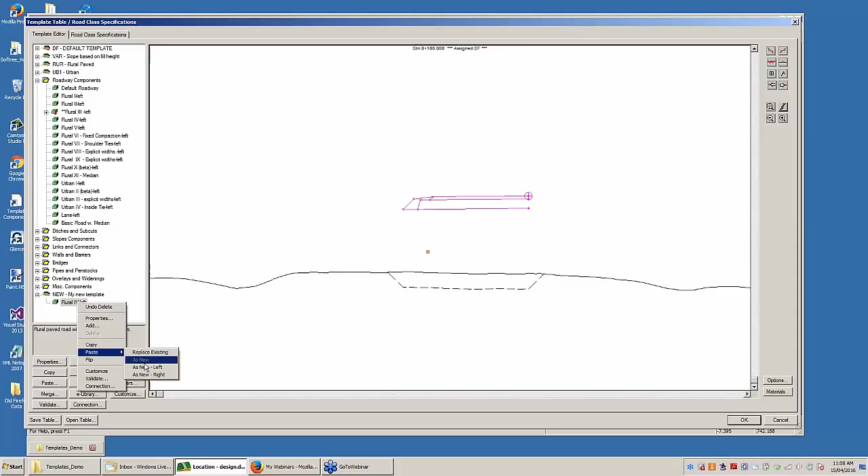So today Craig will be covering template components in Road-Eng,

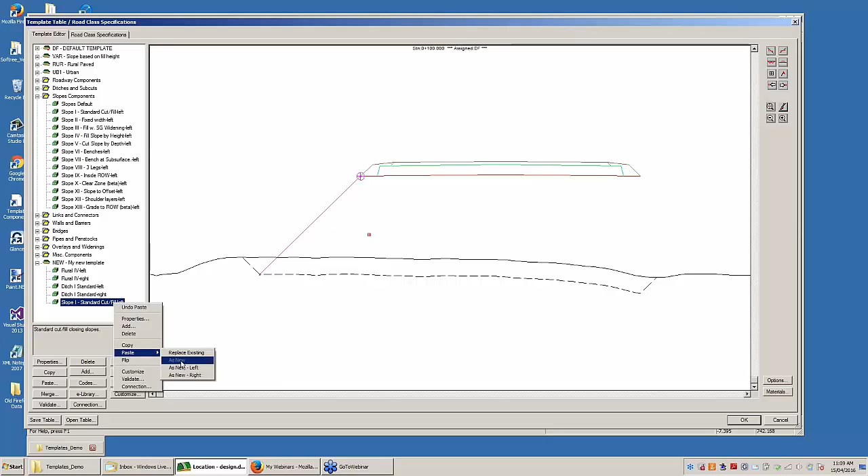And just a quick outline of what Craig will be covering today: parameters, surfaces, and point codes with template components, parameter overrides, reference features, and examples.

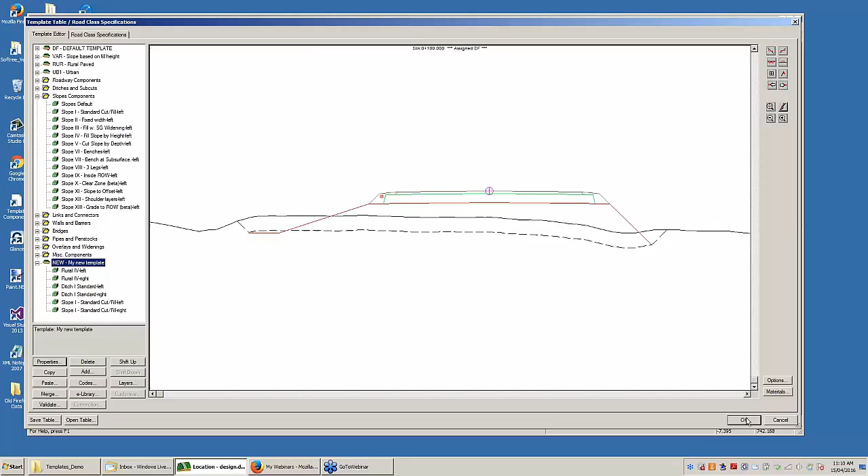So today's seminar is going to be about, and interestingly, this is probably one of the hardest parts of Road-Eng for new customers. I think we typically find when we get a new customer going, we'll spend a bit of time with them to help sort out their template components. The good news is that once they're up and running with a handful of components that work for them, they're generally pretty happy with those ones, and they can modify them and tweak them as they go. But it is a tricky part of Road-Eng, so yeah, you can be expecting that.

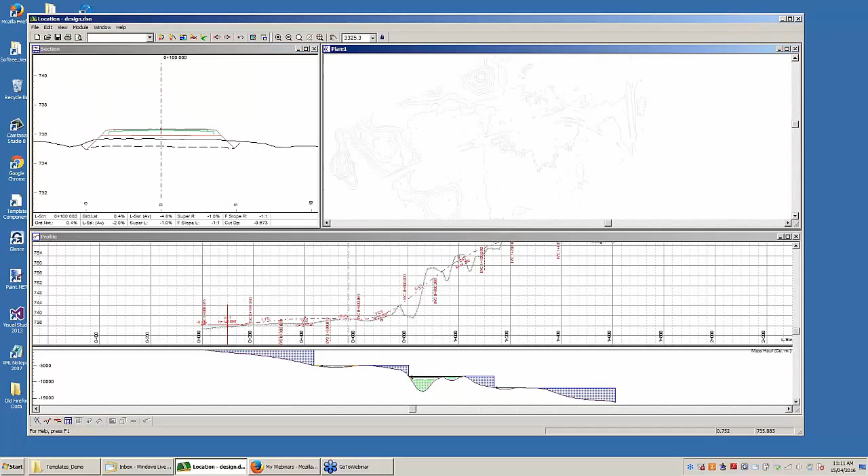Template components, they are the things that allow you to define your cross-sections. And if you're using other software like Civil 3D, they're analogous to assemblies and sub-assemblies and that sort of thing. So here I've got an example road. It's a couple of kilometers long, and it's got a rural cross-section template defined. And in Road-Eng, the way you create, adjust, and manipulate templates is in what's called the template editor.

Edit templates, and this environment is sort of like an experimental area. If you hold the left mouse button down, you can move your template around, and you can see how the template's behaving in different situations. You can jump to a specific station and look at the template on that specific station. And in this environment, what we're doing, moving things around, is not having any effect on the design other than to review how your template's working.

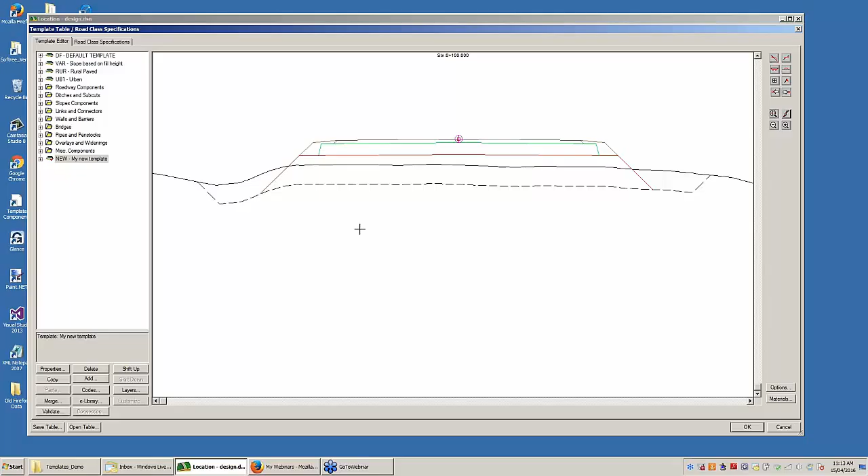A template is made up of what we call template components. So this template here, the default template, is made up of, you can see the left-hand side, it's highlighted there in magenta. It's the left-hand side of a roadway. There's the right-hand side. You've got ditches which aren't active now because we're in fill. If we came down here, you'll see the ditch component. So each of these is a component, and each of these components has behaviors and parameters.

I'll just have a quick look at some of the parameters involved. So I click on the component, I go into properties for this type of component, and in this case I have ACP thick, which is a pavement thickness, pavement width, base thick, and as I move down through these parameters, you can see in the cross-section the software is trying to highlight what that parameter is affecting on the cross-section.

That's just one component. We have a lot of components available. We have an eLibrary. I'll talk a little bit more about that in a minute. The eLibrary is constantly being updated, so it's a good idea to get new copies of the components regularly.

So we have all these components, and what we can do is let's create a new template just to see how that process works. So one way of doing that is to copy an existing template and paste that as a new template. I've got a new template now. Let's just go in and change it a little bit. I'm going to call it new. My new template.

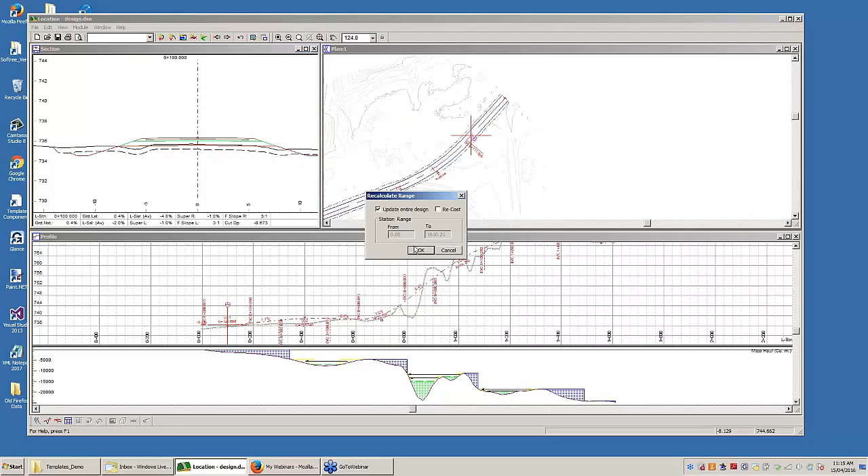You can see that with the template, which is the holder for the components, you have some parameters. You can disable the volumes for a template. You can disable clearing and stripping, and you can set your crown slopes in the template. And you can also disable the super elevation being overwritten by the curved super, so you can fix the crown slopes on your template. So these parameters will apply to the objects inside the template.

So we've created a new template. Let me just get rid of the components that I had in there and replace them with some other components. Let's go into our library entries here, and let's grab, oh, I don't know, let's grab Rural 4. By the way, you can look through these components. You can see they have quite different geometries, shoulder situations, all sorts of urban and rural details that you can get. And each of these is configurable. So there's quite a few options that are available in our basic libraries.

So let me carry on, copy this rural component, place it in here, copy, paste as new. Most components have a left and a right side. So I'm going to go back to the original one that was there and delete it. Again, click on that component, copy it. I'll paste it onto the right. Now I've got a road, basic road object.

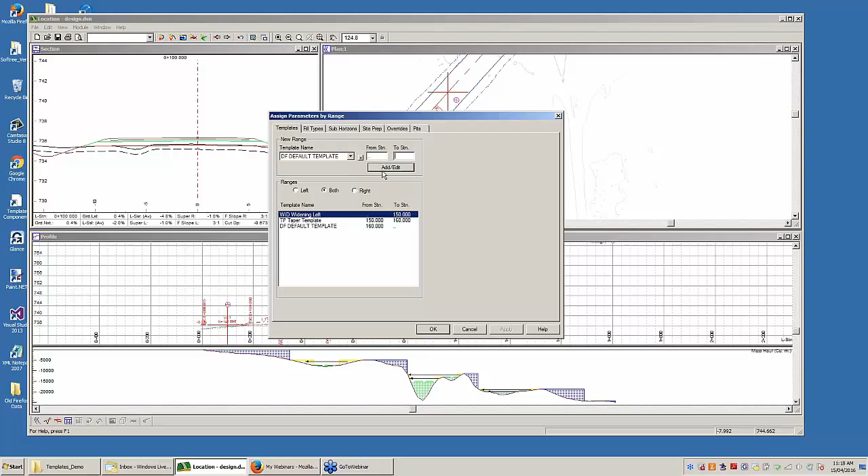It's quite often useful to do one side, get everything set up on one side the way you like it, and then just copy and paste it on the other. Because each one of these, you'll want to dimension to suit your situation, your ACP width, slopes, all these sort of things you would dimension to suit your needs. Once you've got one side done, you'll probably do it on the other.

So I've created a new template. It looks quite different than the other template that I had here, which was my starting template. I've built it using these components, and I can adjust the components to do whatever I want, well, whatever they're capable of. So I've created a new template. Let's just now exit from the template editor with the new template. I'm not going to recalculate anything.

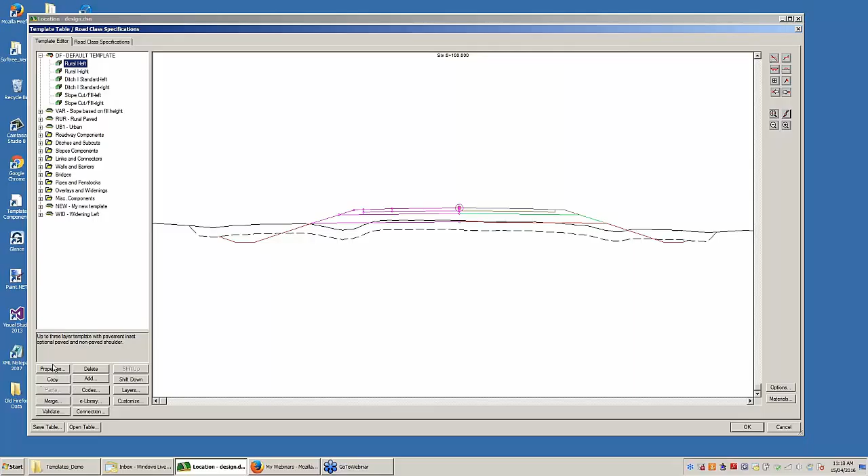I'm going to assign that template to a range of stations. So I do that in Edit, Assign Parameters by Range. Templates, the first tab here, and I had the default assigned to the entire road before. Now I'm going to choose my new template. There it is. And I can assign that either to the whole road, or I could maybe assign it to a range of stations if I wanted. I'll just assign it to the whole road.

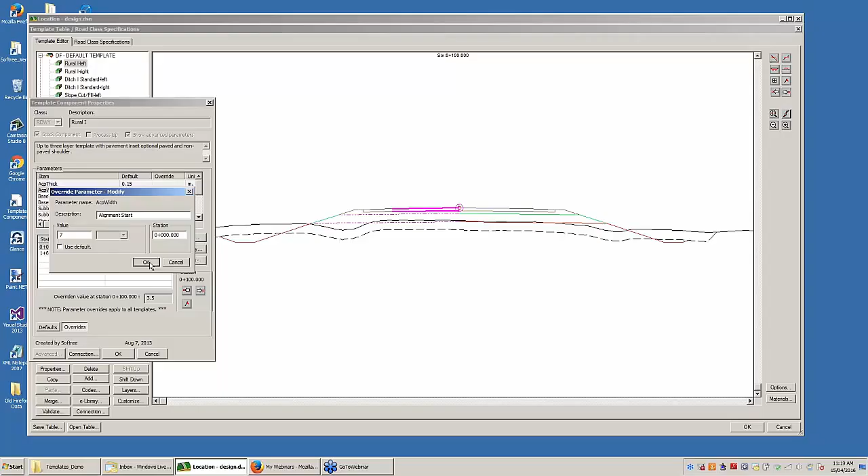And there we go. We've got our new template assigned to the whole road. So that's the process. You create templates. The less you have, the better, of course. It's just simpler. You assign templates, and then you assign them to a range of stations.

One thing to note here is that I have stripping going on. And stripping in RoadEng can be handled by a template, but it's much easier to handle stripping through an assignment, which is done in the same menu. Edit, Assign Parameters by Range, go into the Site Prep tab, and here I can assign stripping to different ranges of stations. And in this case, I've got a stripping depth of 0.5 meters, and I'm telling it to go from the slope stake base with a 0 offset on both left and right sides.

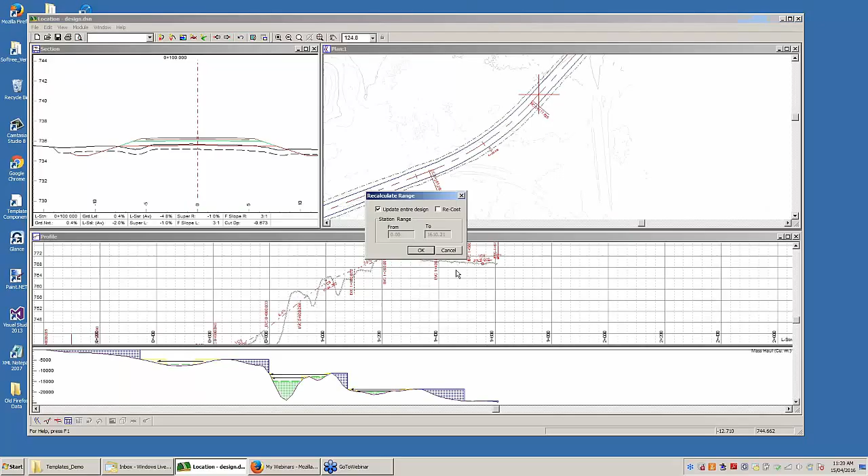And so that's what it's going to do. It's going to remove 0.5 meter of overburden out to the slope. If I wanted to add something there, maybe an extra offset from the slope stakes to strip to, I just make that change, recalculate, and we should see the stripping. So the stripping is dealt with on a special basis. It's a lot easier to deal with it in the Assign Parameters by Range than with the template.

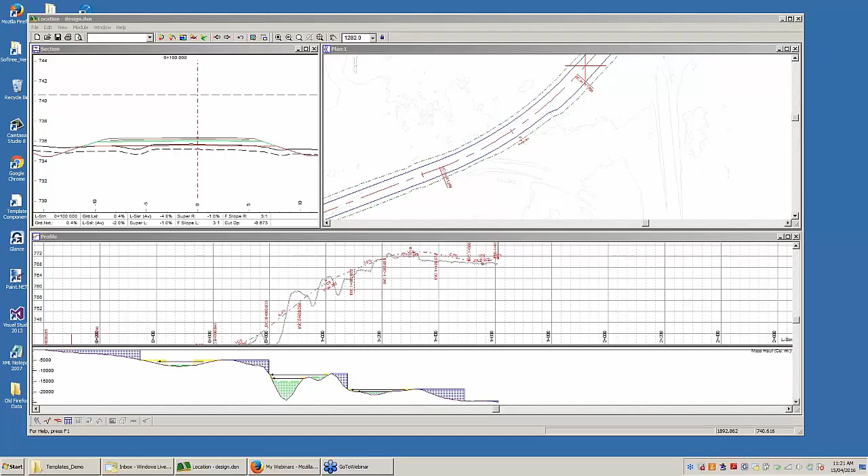So lots of options here. Ideally, you want to find a template that works in all the situations that you have, which involves oftentimes having a smart template, a template that does certain things the way you want to do. But in the real world, you'll find situations where you just can't get the template to do exactly what you want. So you're faced with having to change it in some way.

Let's just look at an example here for a second. I'm going to go back and reassign the default template. This is so I don't get confused, which isn't very difficult to do. I'm going to assign our default back to the whole road. And let's look at how we might widen the road down at this end. Just simply widen it. So the most straightforward way to do that is to go into Edit Templates,

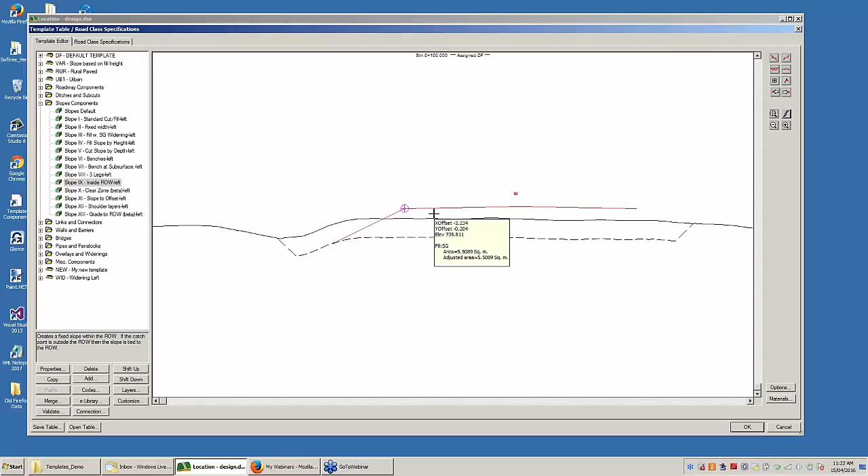copy this template, paste it as new, and I'll change this one. I'm going to call it Widening Left. Oops. For those of you who use RoadEng, this might be a bit mundane, but bear with me for a second. Widening left, I'll go into this side and I'll widen the lane width. Let's go out to 7, so it's quite a bit wider. So I've got a widening left template now, and I'll come in and I'll assign that template to a range of stations. Widening left.

Oh, I understand there's a question. Let me just finish my thought here.

So I'll make this widening apply to 0 to 150. Press Add Edit. So now you can see we've got widening left 0 to 150 and default template beyond that.

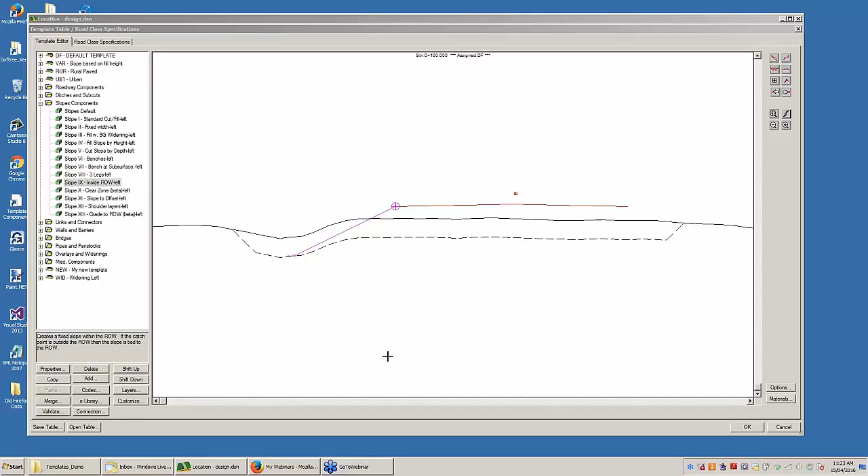Let's just go ahead. I know there's a question pending. I'll come to you in a second.

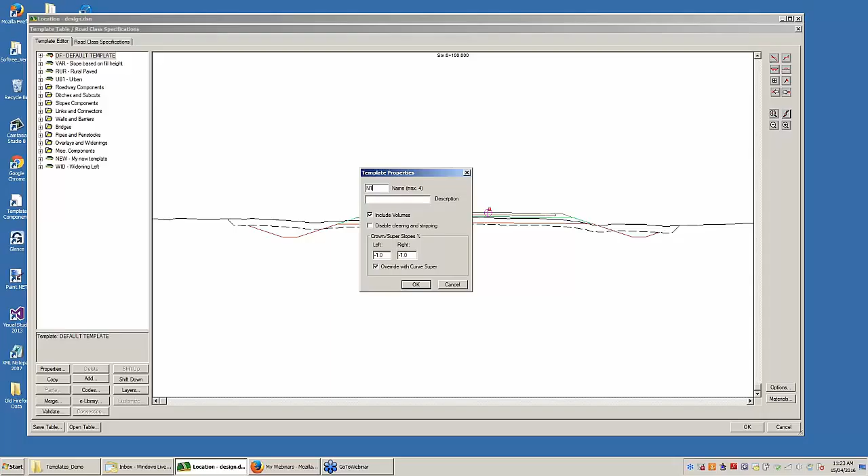Press OK here, and we zoom in, and you can see what's going on. We've got station 0 to 150 wider road, and then a very abrupt transition. And I'll come back to this transition in a second.

Let me just have a look at the question. Sorry. Okay, well, this font is too small for me.

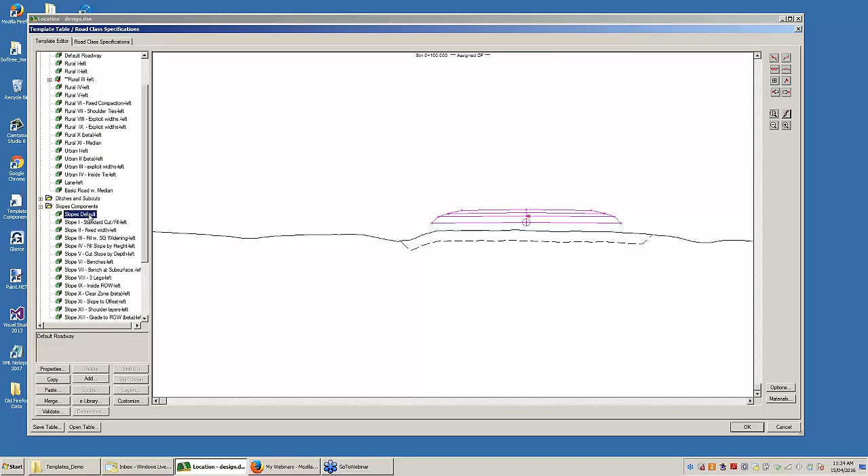Is there an option to create a transition area between two different templates? Aha. Timely, very timely. I'm going to answer your question right this minute. Okay, so we've got a template here, and there's obviously an abrupt transition. That is not what we want. So we have a way to deal with that. We actually have several ways to deal with it.

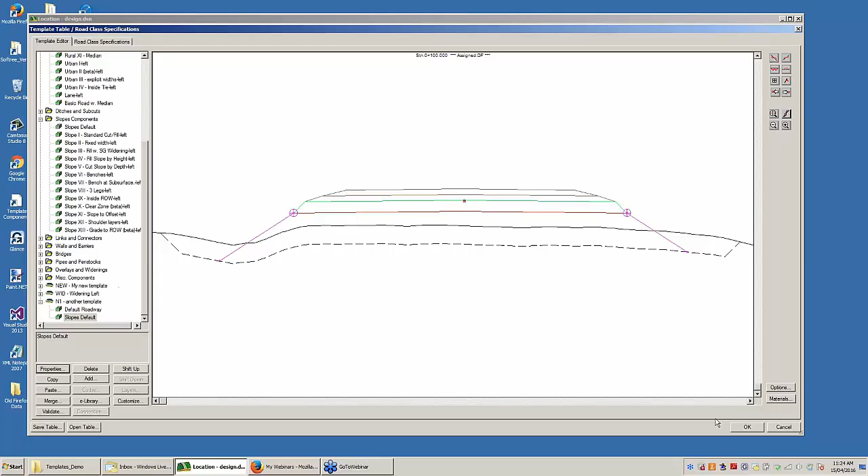The most straightforward is to just assign a special transition template, which we call the taper template, to a section in between here. So let's go from 150 to 160. I'm going to place this taper template into. So now I've got widening 0 to 150, taper 150 to 160, and back to the default from 160 onwards. Press OK, recalculate, and there you can see it's transitioned between the two templates over that range of stations that I gave it.

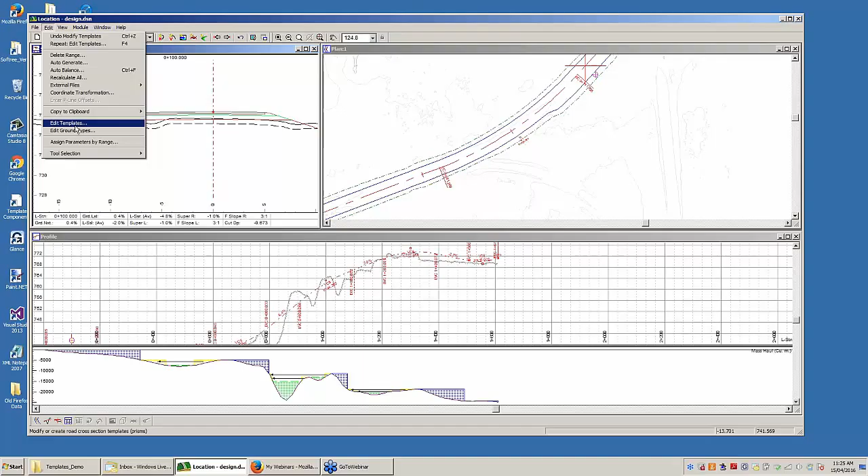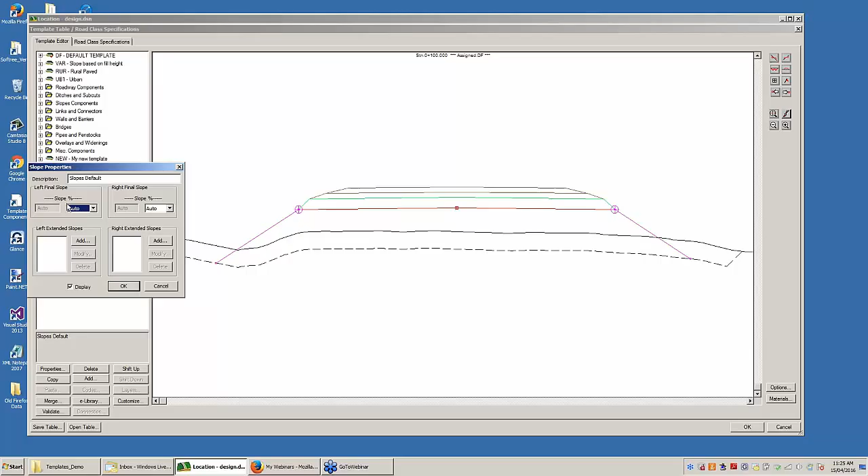There is a bit of a catch with the transition template, and that is that the templates that you're transitioning have to be quite similar. If one of them is an urban section with sidewalks and stuff, and the other one is a rural template, and you try and transition between them, it's not going to do a very good job. So where you change from completely different cross sections, the transitioning does not always work that well. And there are other ways to deal with that, but that's basically one way to transition.

Okay, so that's the most straightforward way of dealing with forcing and changing the templates. Let's just again go back to our default for the whole road and have a look at another way of doing this. So I'm just going to reapply the default, get rid of all that stuff, recalculate it. We're back to the default for our entire road.

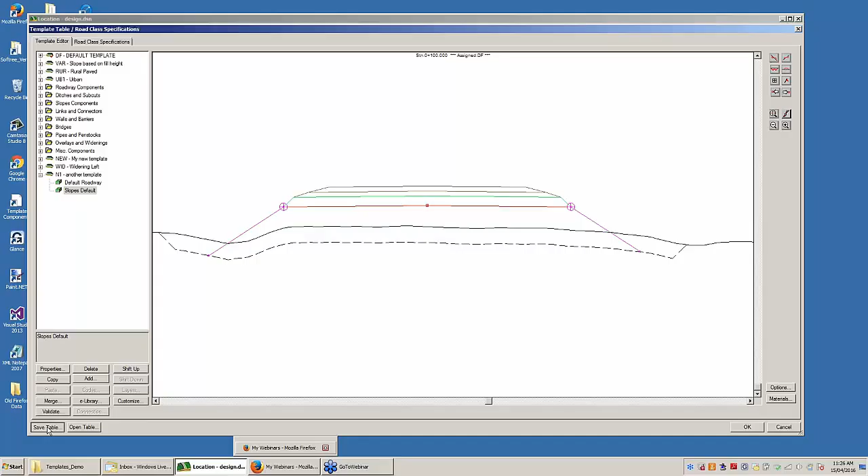By the way, all these techniques apply in other dimensions. For instance, if you had a deeper ditch template, you would see it in the profile and so on. Okay, so let's look at another way of widening the road which does not require creating another template. And oftentimes we get people's files and we see people with hundreds of templates, literally. It's not the best way to do it. If you're just varying one parameter, there is an easier way to do it. And that is something we call parameter overrides.

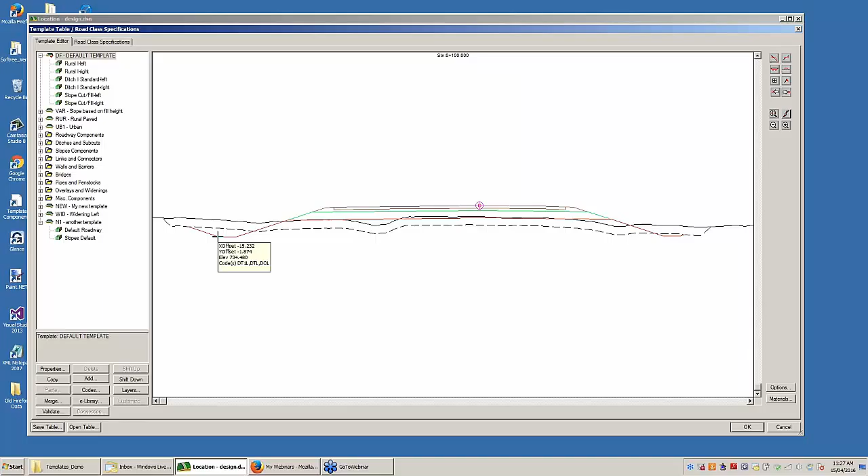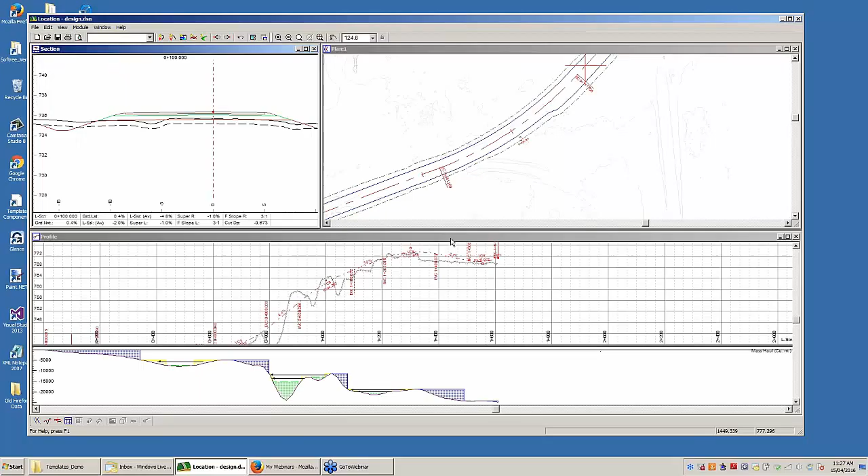So what I can do is I can modify that. I can say, okay, I want to start with, let's go 7. I think that was what we did before. 7 at station 0. We'll override that value. And then I'm going to add another override. This one's going to be at 150, and it's going to be 7. And I'm going to add yet another override to taper it back to the default at 160. So I'm going to go back at 160.

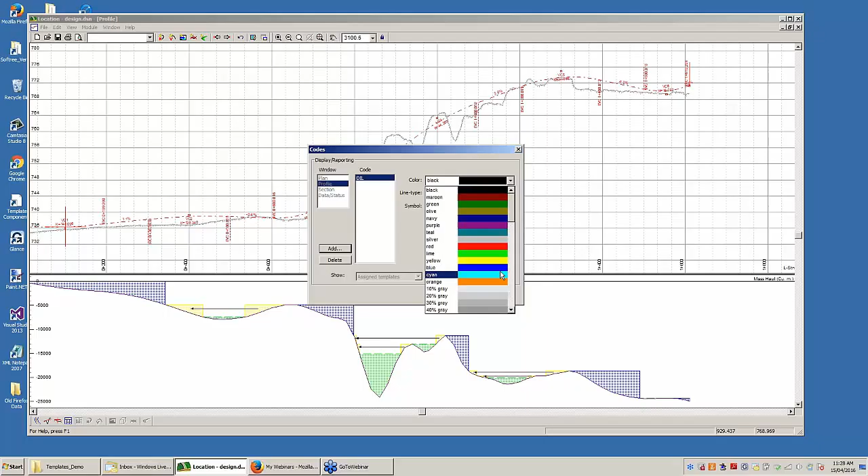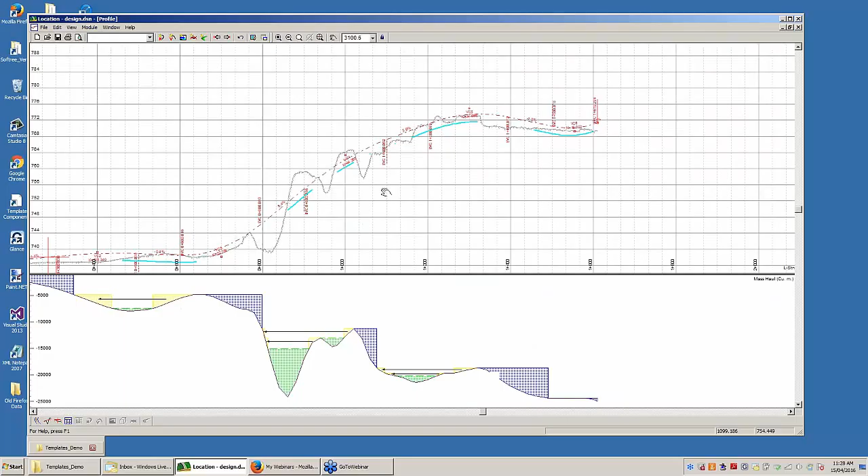And this should give us, if I didn't screw up, something similar to the multiple template approach. So 0, 7, 150, 7, and anything in between it's going to linearly interpolate. So if I made 150 a bigger number, 10 say, then it would vary linearly between 7 and 10 in that station range. And back at 160, it's going to go back to 3.5. So let's just have a look at how that works. Press OK here. Press OK.

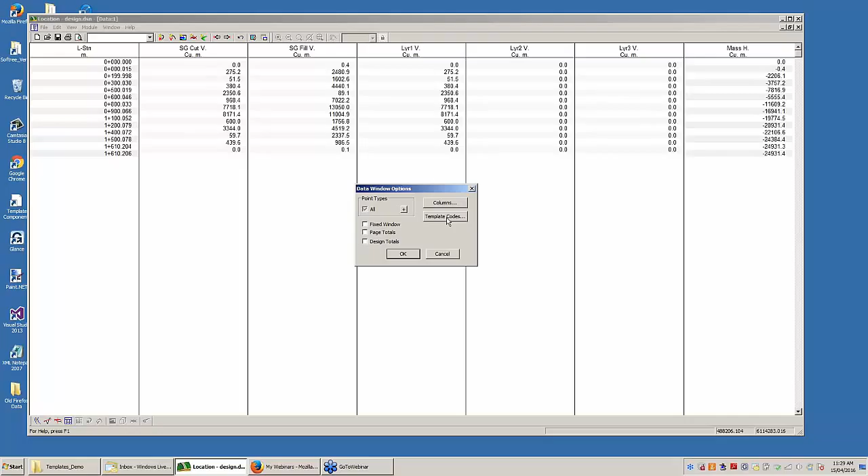And there we go. Same effect, but this time we still only have one template assigned, and we've just varied the width of the road. And this technique, you know, it's a little bit tedious, but you can control various parameters in the template explicitly that way without having to change templates.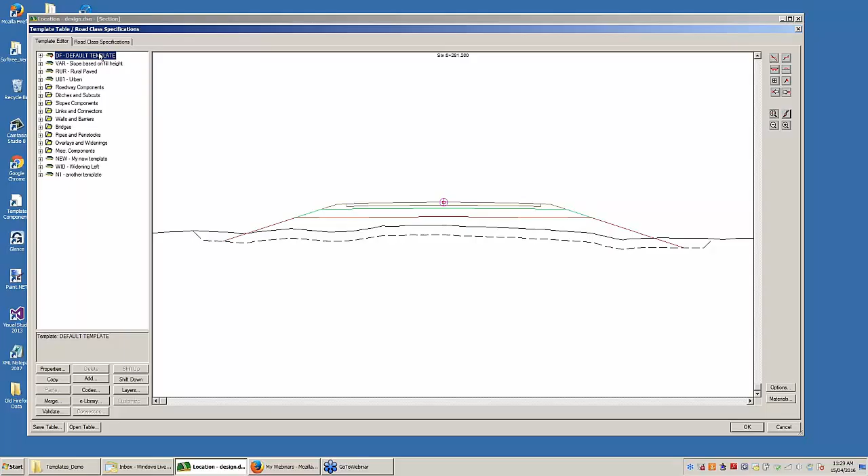Let me just check here. I've got another question. Can the side slope follow an existing constraint within a particular zone, land acquisition? Yes, absolutely. Let me just repeat the question. The question is, can the side slope follow an existing constraint, like a right-of-way boundary or some land constraint? And the short answer is yes. The way that's dealt with is we would choose a template component that does that. When I created the new template, I used just the default slope, but there are other slopes that will do things like stay inside right-of-way here.

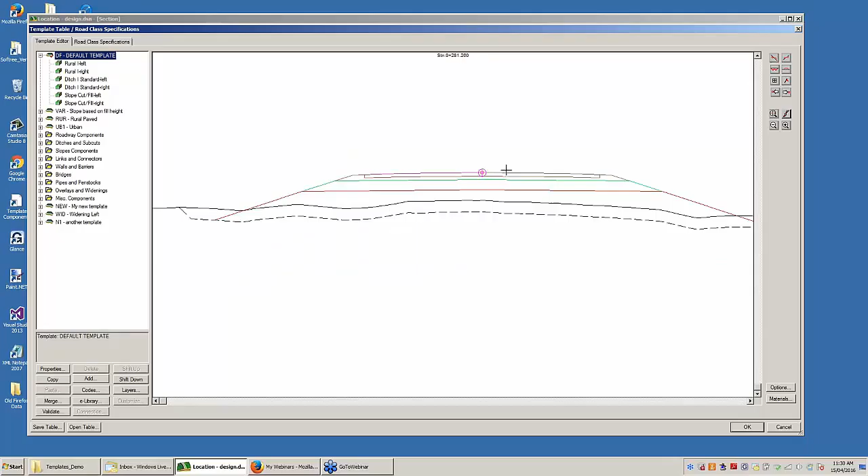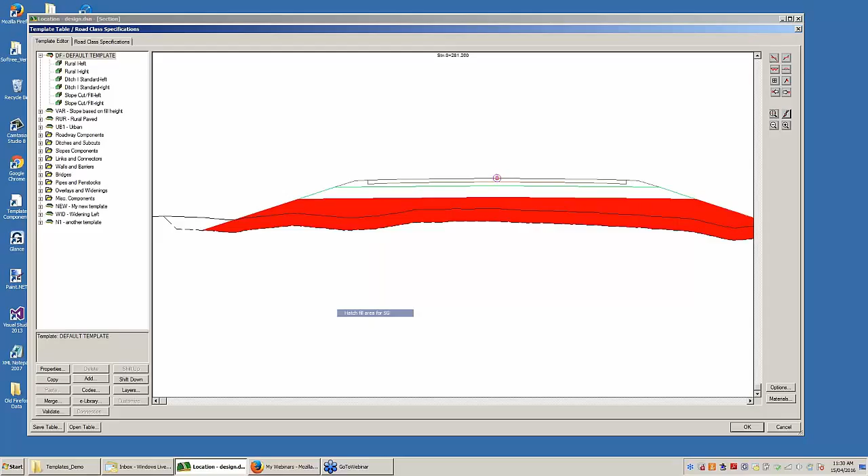Here's an example of one. Properties, you can give it a right-of-way offset, and it will stay inside that offset. There's other components that will, for instance, widen the ditch to get material and close to a right-of-way. Yes, there's lots of ways of doing that, and the way to do it is to choose a component that does what you want to do from our standard library here. Yeah, slope to offset and so forth.

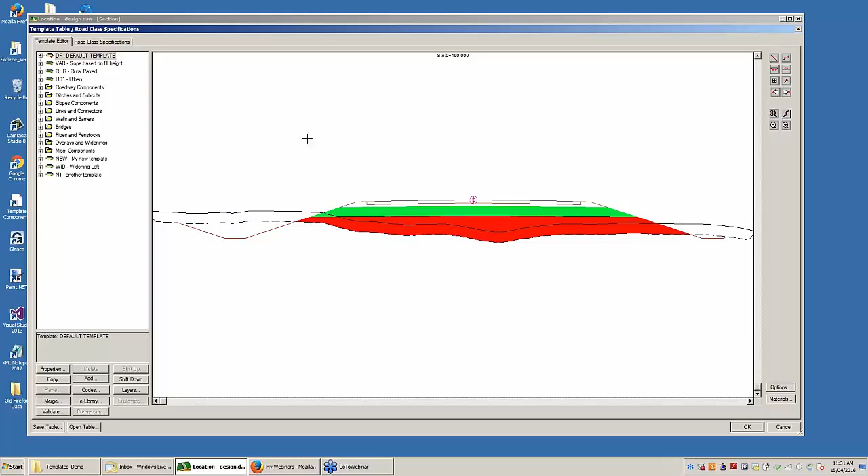Okay, I got another question. I'm sorry, these questions on my screen are in tiny, tiny, tiny font. And you want me to read it out loud?

Okay, in templates, in very steep slopes, the OB layer can run off the page to the ground slope override. Yes, that's very true. Can you, in the template editor, get the cut slope to cut the OB layer at the top of the cut and ignore the ground type? Yes. That's very simple. And that is done by, let's look at the default template that most people would have, which I kind of skipped over a little bit. If I just take a default template here, new one, another template.

Okay, and I change these components out again, and I put in our standard roadway, which is sort of a legacy component, but it will appear a lot of times in your new designs. And delete this, and I'll grab the same thing. I won't bother with the ditch. Copy,

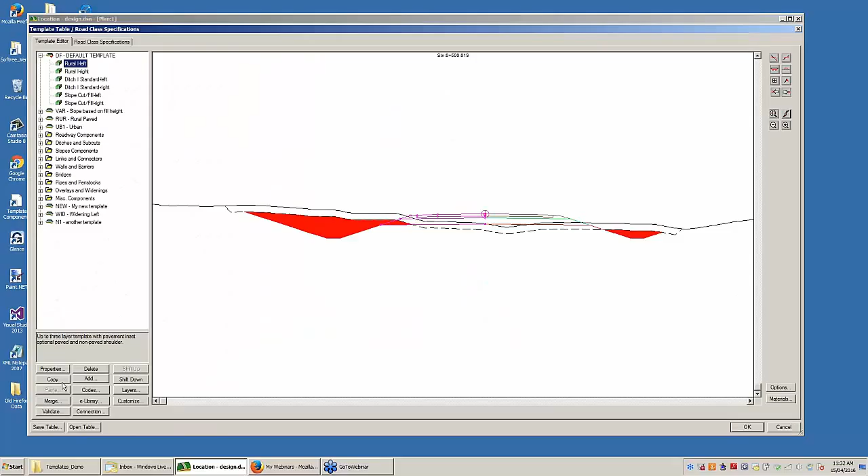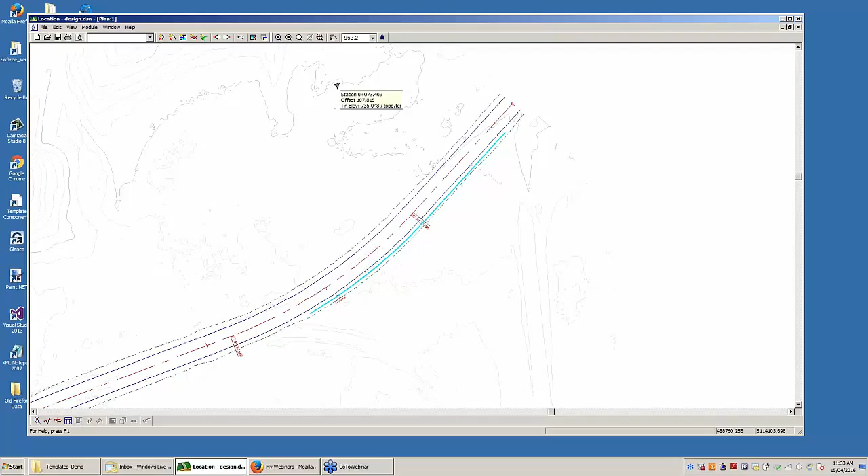edit, paste as new. Okay, in the default slopes component, there's a slope control called auto. And what auto means is use the ground slope. So if you've got one or two layers, and you've got your slope set to auto, it will change slope as it penetrates through those layers. And what the question is about is that if you're on a steep side hill and you have a layer of overburden and it's got a very shallow fill angle, the slope will run away.

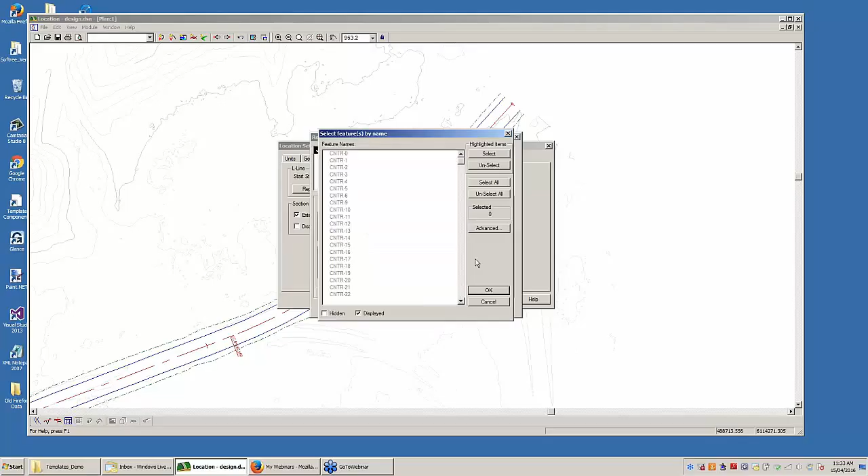So what you can do quite simply is to go in to your template and change that slope, set it to whatever you want here. So stop using auto and explicitly change that slope. I hope that answers your question. That's one way of doing it. The other way of doing it is to strip off the overburden, so you're into more competent material that have better angles. But yeah, having the slope controlled by material type is quite useful, and that's what this auto setting does here.

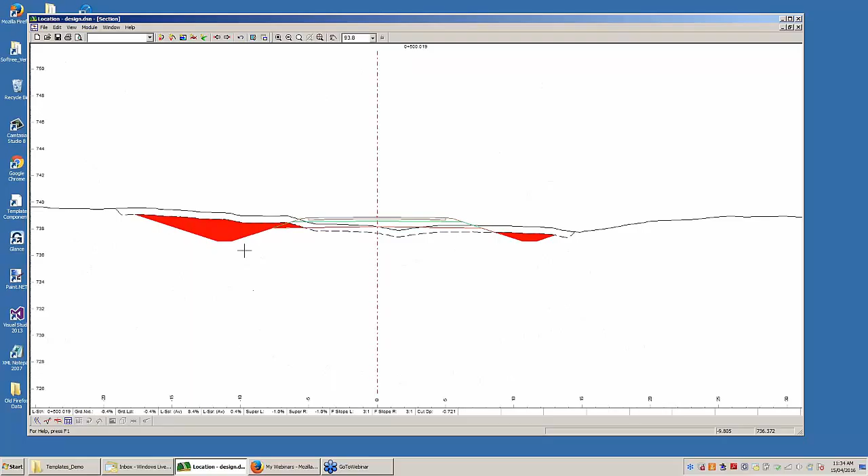Okay, if I didn't answer the question, call us or email us, and we'll be happy to go through that question in a bit more detail. This design is not the best to illustrate that because it's on pretty gentle ground.

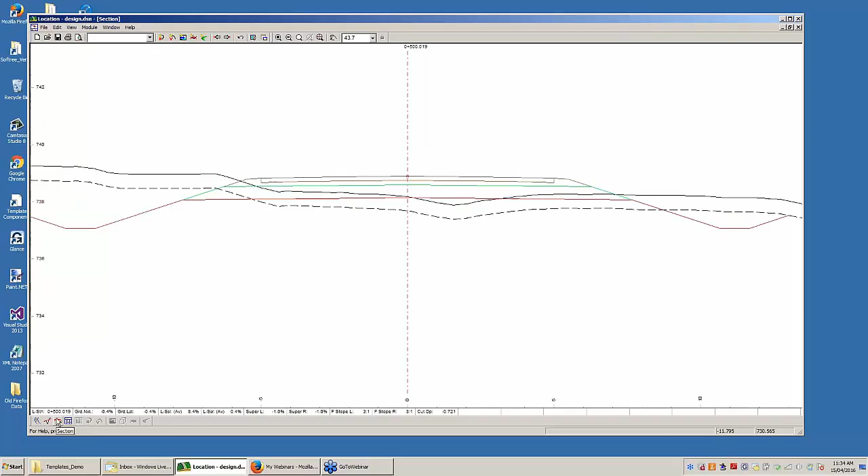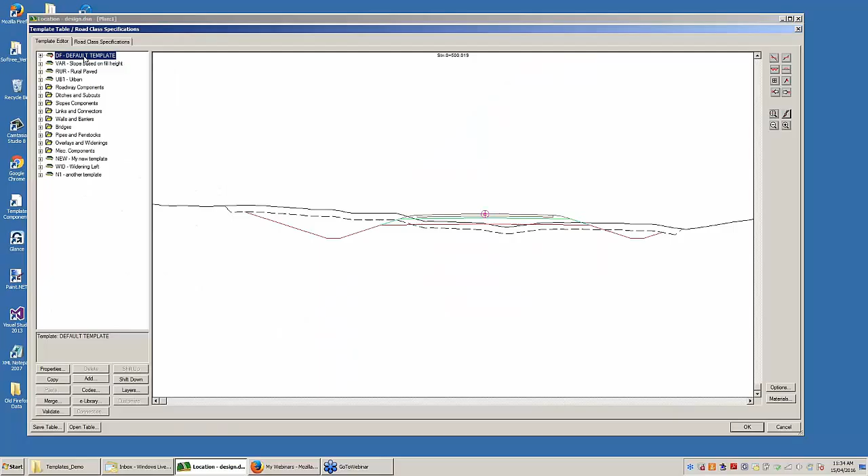Okay, by the way, just in passing, the template editor, you've got all these templates and components and all this stuff, and you want to save them because you're going to reuse them. You can do that in here. You can save the table. You can save whichever components you want from the table, and then they can be reused in future sessions of RoadEng. Okay, let me just see a couple of other things I wanted to talk a bit about.

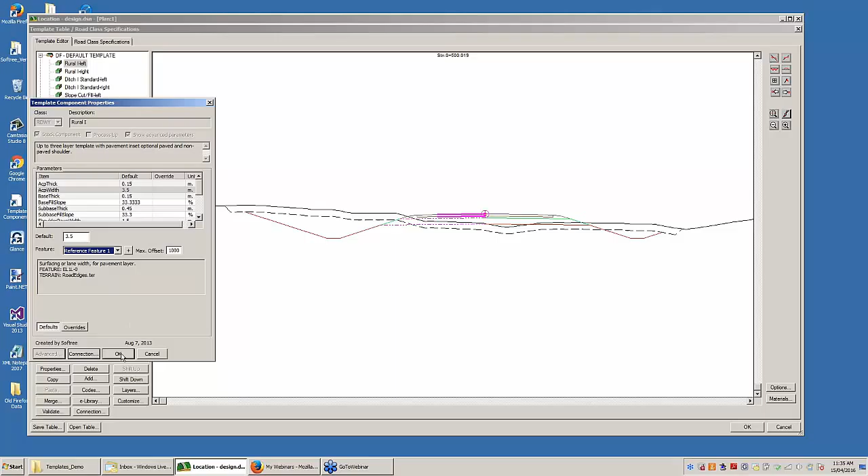Point codes. A very, very important part of templates is point codes. So if I just hover on one of these vertices here, you can see down there it says codes, and it's got several, the main one there is REL. DBL might be interesting, but REL is certainly interesting. There's another template point code down there called DIL.

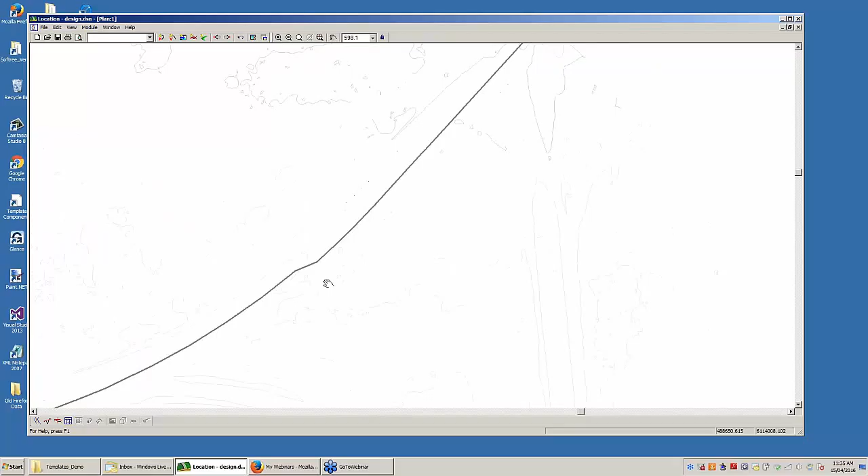So you'll find in most of our templates, those point codes are standard, RE, road edge, or edge of subgrade. DI will be ditch inside, and then it'll have a left or right designator after it. And there we've got DOL, and then SS, SSL, and SSR. Okay, what can we do with point codes?

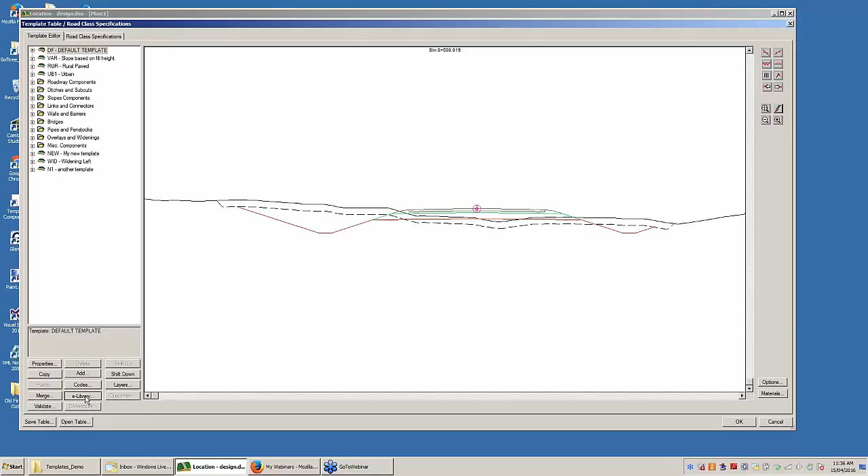They're actually quite useful. One of the things that's easy to do is to display in our profile window a ditch line. So I'll go into the profile window and go to the options here, and I'll go to where it says template codes, click on that button, and I'll add a template code. I'll add the ditch inside left. There we go. We'll give it a color and a line type. And recalculate. So now you're going to see the sections of road where that point exists. So in here, obviously, if you look at a section here, it doesn't have any ditches.

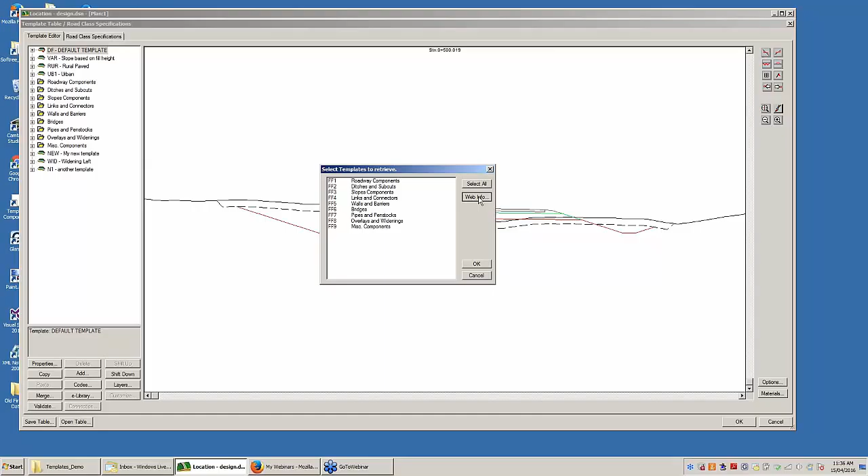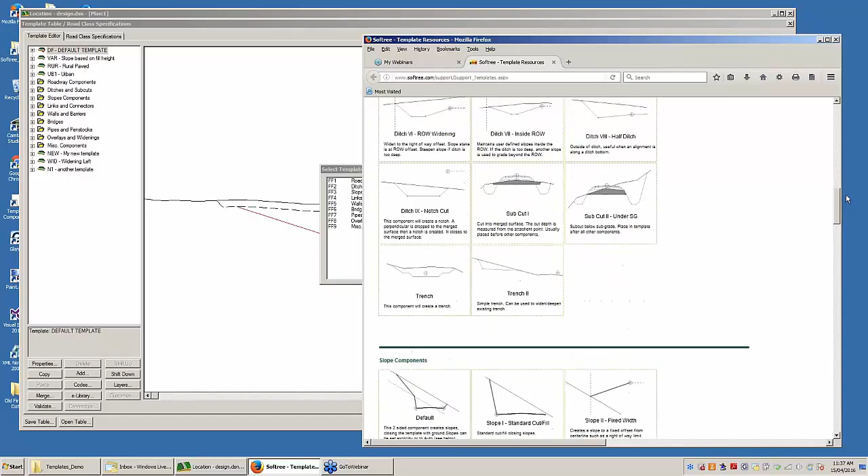And of course you can display these point codes in the plan view. Same thing, if you wanted to add point codes into the plan view, you could add a ditch line in the plan. Again, color, line type. And there we go. So you got ditch lines in the plan. So the point codes can be very useful. You can do things in the data window here. You can add point codes into the data window and get the coordinates of those points.

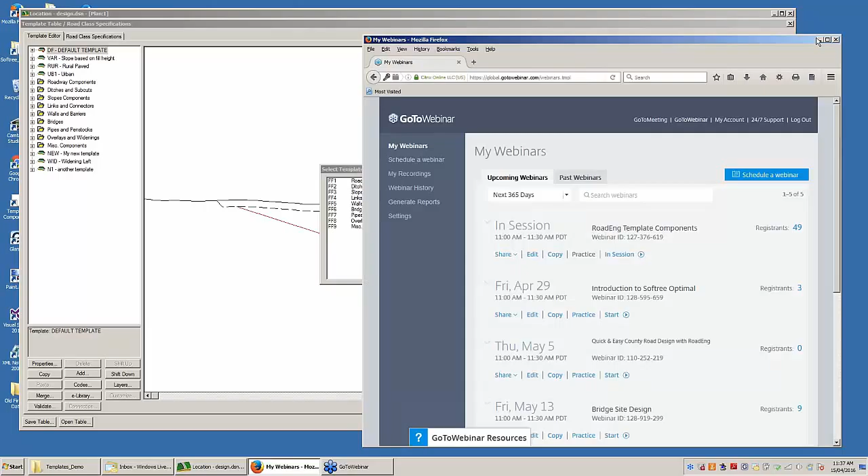So in summary, the useful points on the cross section have codes with them, edge of pavement, edge of slopes, and those codes can be used to draw in plan and profile, or they can be exported through the data window. So point codes are very useful. Another thing about templates that is very important is volumes.

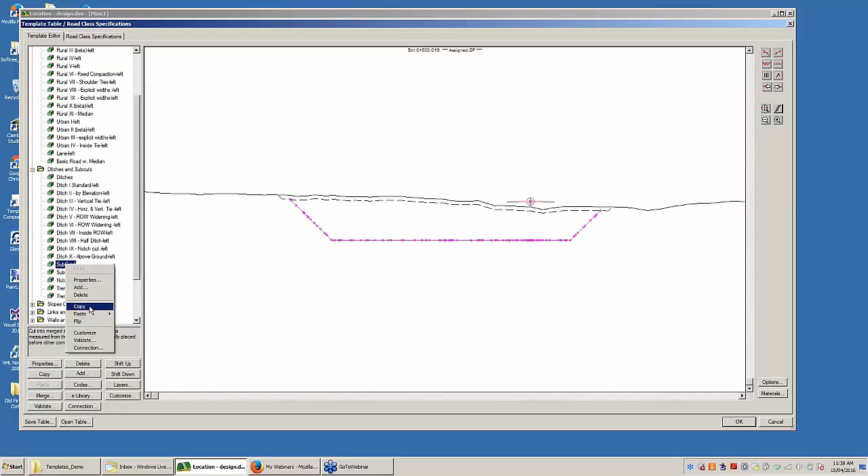And yeah, these components, we can actually build these. These are customizable. It's a subject for another webinar. They're actually like miniature programs, and they generate surfaces and point codes and all this stuff. And if you ever get into customizing these things, you want to be very careful because you can affect your volumes.

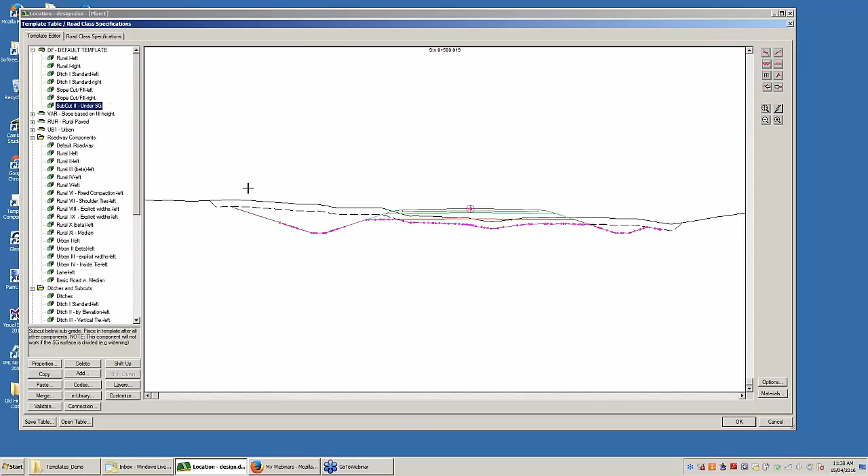So you can see in this particular component, or in this template, that I've got some green area, red area, and so on. These are what we call template surfaces, or layers. And if I hover down here below the subgrade line, it's showing me what the material is. You can see it says fill subgrade, and I can shade that. So I can see that's subgrade fill, and I can kind of check what's going on with my cross sections using that shading. Similarly, I can shade some of the other areas, SRF1, and so on.

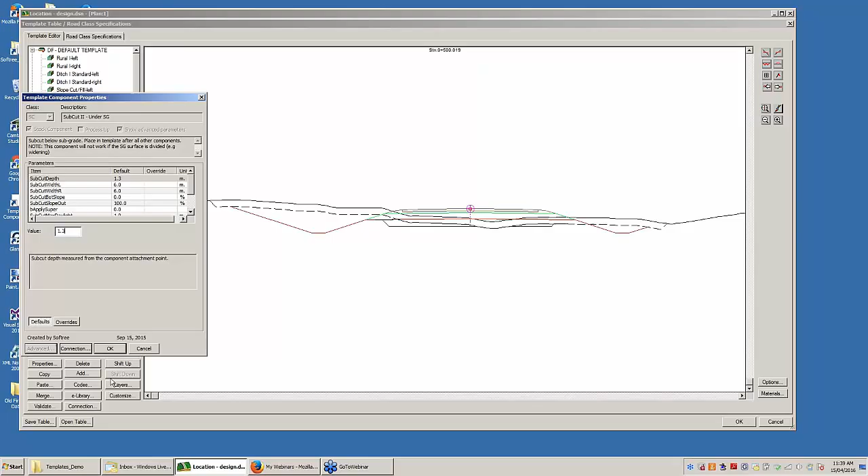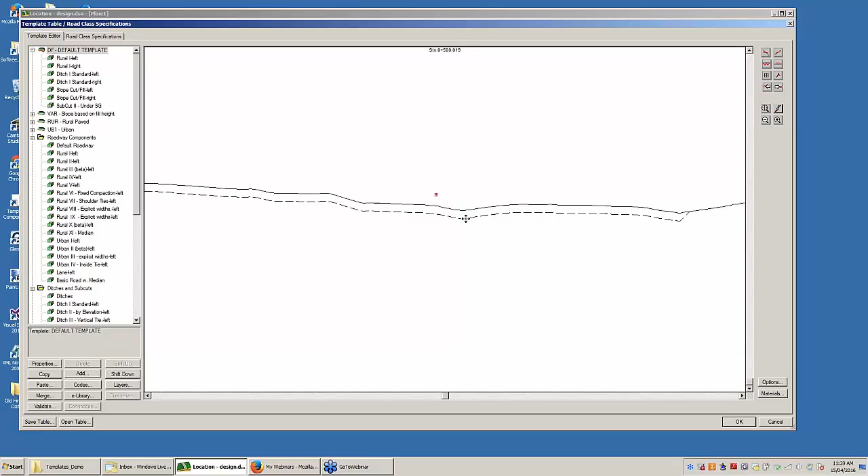So you can go through, and it's quite useful to do this sometimes, just check what volumes are being accounted for. So I'll turn off the fills, and I can do the same thing for cut. There's my subgrade cut, and I can move through and I can see where it is. And if you hover in the area, it will show you the area and the adjusted area, which is expanded or compacted. So it's a very useful way to, you've got your design, go through and check that it's calculating the right areas.

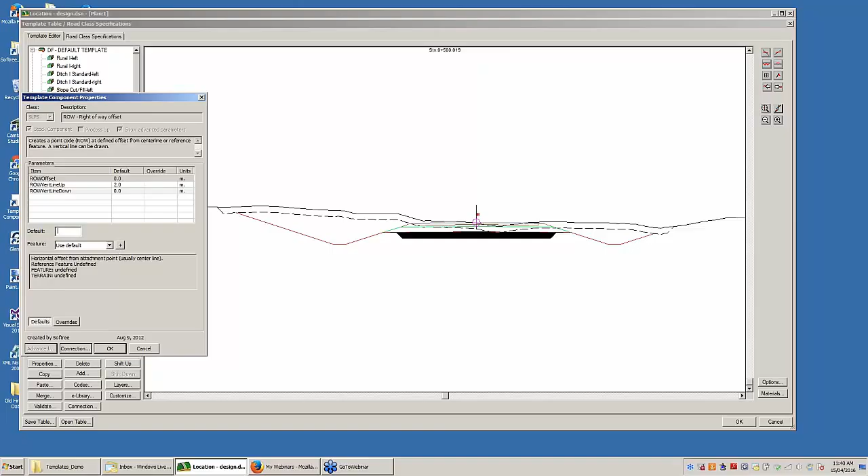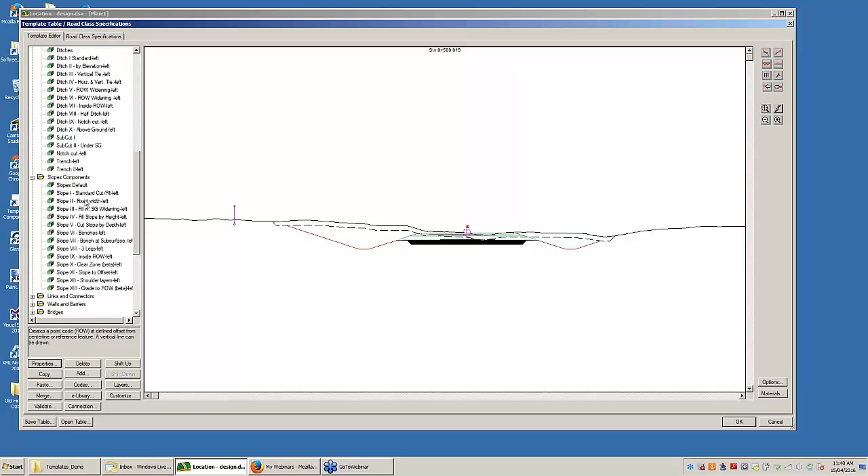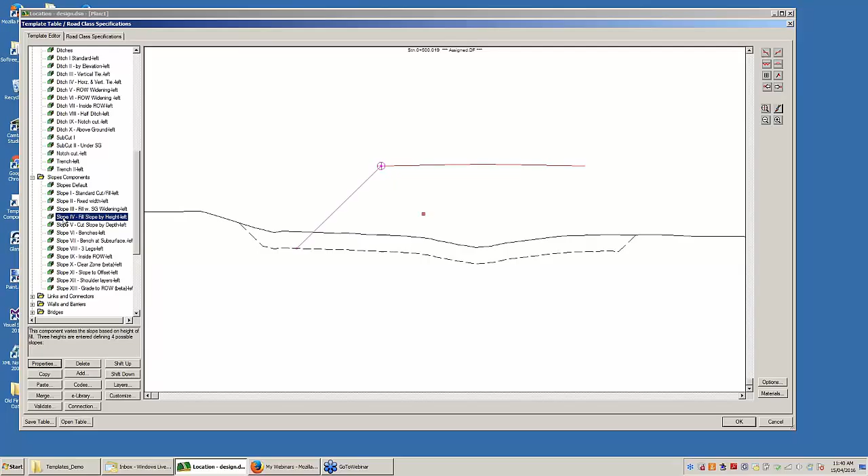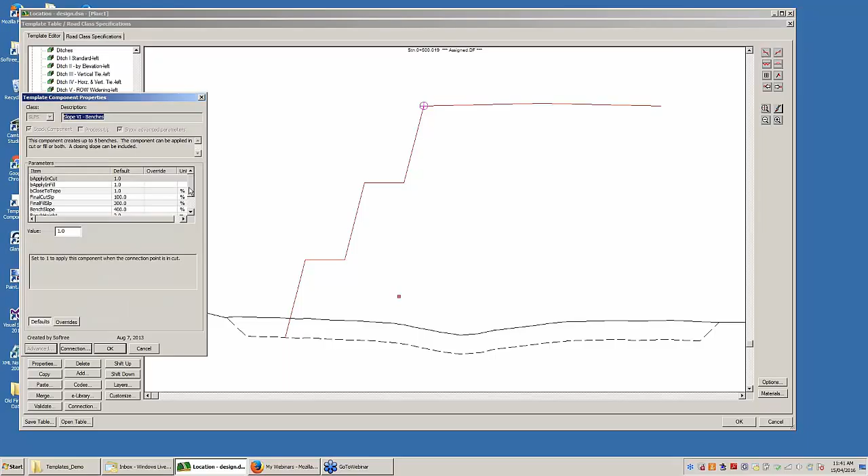I'm going to just go into the template, remove the overrides which I put in there. So we'll be back to square one. There, just delete that, and set him back to default. Okay, so there's our road as it started, and I've got a terrain file with a reference feature in it that I'm going to bring in here.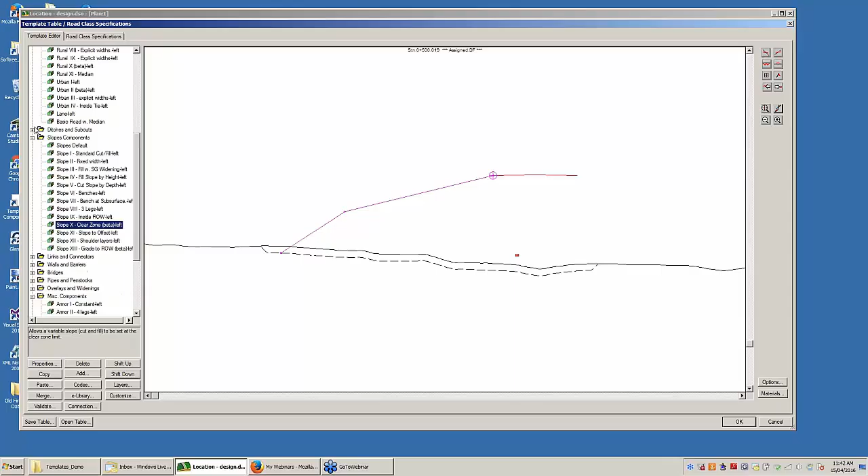So I'll go into Module Setup, create the reference terrain and reference feature. First I have to specify a reference terrain, and it's going to be called road edges. Set this up already, so that's my reference terrain. And then in the road edges terrain, I'm going to pick, oops, I got the wrong terrain here. I'm going to pick a feature, which I'll be clear in a second what that feature is.

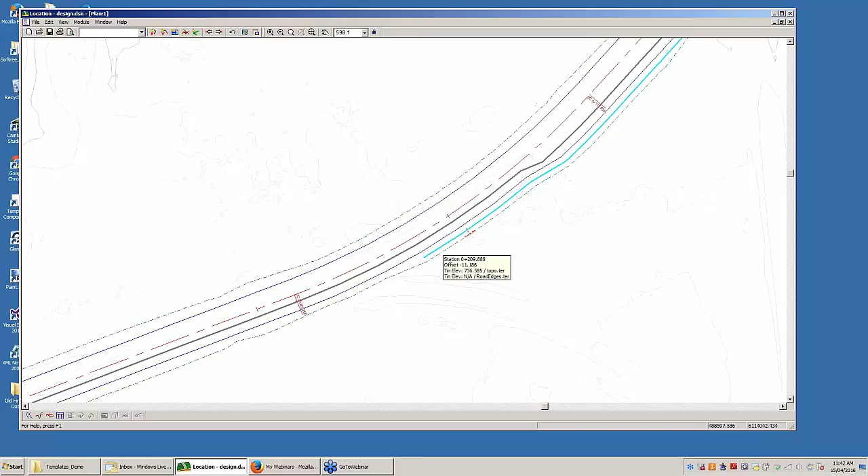So that feature is a widened lane feature. So it's the edge of, turn the stuff off. It's actually this point on the left-hand side, and what I'm going to do is I'm going to attach this point on the template to that feature to give me a widening in that area. Another way of doing it. Is that clear? So this feature here has come from a file that I created, and I'm going to attach my template to follow this feature.

If you were generating something oddly shaped, this might be the best way to do it, is to use a reference feature. So I'll go into my templates, back here to default template, go into the properties and choose my ACP width. And here, and you need to have this in the template, you've got an option to tie to a feature. Some variables won't let you tie to a feature, but this one, I can tie the width of the template to a feature, and I'll choose reference feature 1. So now when it finds reference feature 1, it'll tie to it.

And let's just see what that does. And there you can see the blue lines are the road edges. This is the edge of lane feature, which is tied to it. So the road edges have done the same thing that we did the other two ways. So it's a third way of doing it. Yeah, reference features can be used to tie ditches, to tie edges of road, all sorts of things. Yet another option.